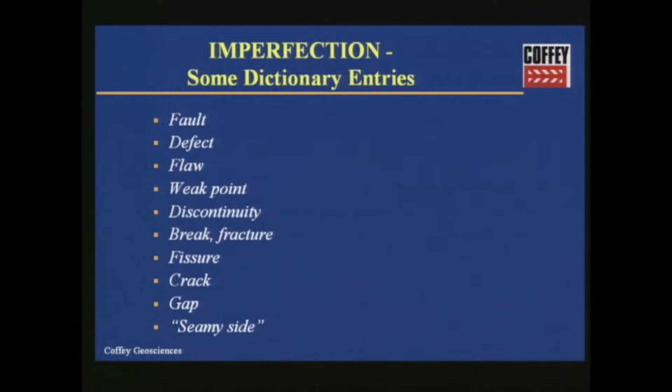Usually we start with a definition of what we mean by imperfections. And if I look in the dictionary, I find a number of suggestions: faults, defects, flaws, weak points, discontinuity, a break or a fracture, a fissure, a crack, a gap, and even the seamy side, which I think has sociological implications, but of course also has geotechnical implications in relation to clay seams in rocks.

And in fact, I'll be talking about that in a few minutes. And basically, the tenor of my talk is perhaps encapsulated in this extract from a poem by the Russian poet Konstantinov, who says, 'If a building collapses in ruins, what does it matter that it was built after a talented plan?' In other words, no matter how wonderful our analysis and our design is, if it does not take account of the realities, then we can finish up in ruins.

This is a rather nice diagram that I've taken from Professor Göran Sällfors of Sweden. And Sällfors looks at the process of idealization, going from the future structure which we hope to design and build through a process of idealization, which means developing a model of the structure, of the foundation, of the soil, and then assigning material properties to it, putting that through some sort of mathematical or analytical process, and then coming up with a prediction and a design.

And I want to focus on the top right-hand corner, the process of idealization and the influence of that on the behaviour of the pile.

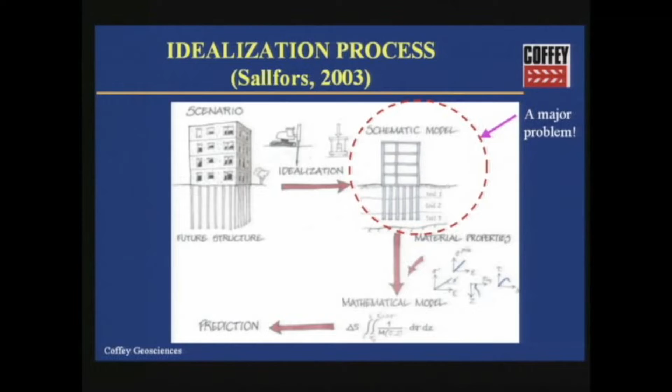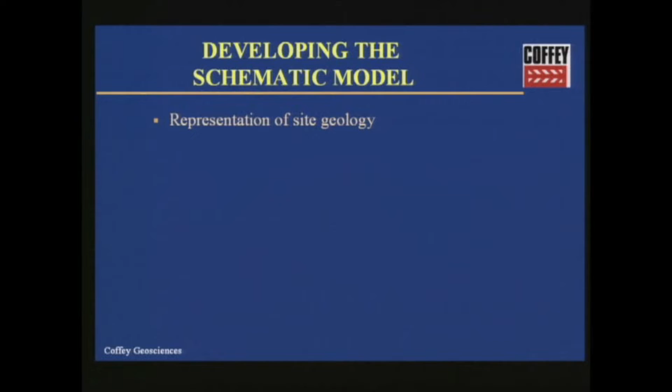Now, there are, of course, a number of important steps in developing the schematic model for our design or analysis. The first of those is, of course, to represent the site geology, and that's of prime importance. The second is then, having recognised the origin, the geological origin of our site, to try and represent it in some sort of simplified form so that we can analyse it.

Then, of course, we have to assign parameters, geotechnical and possibly structural parameters, to our model. And then we have to also bear in mind some of the real behaviour aspects: the fact that soil is non-linear, the pile itself may be non-linear, the soil will be layered and not a nice uniform soil deposit, and we may get loading of the piles not only by structural loading directly, but also by the action of ground movements on those piles.

So I'm going to look at three sources of imperfections affecting the model, the realities of life: natural geological sources, imperfections created by having inadequate investigation, and thirdly, construction-related imperfections.

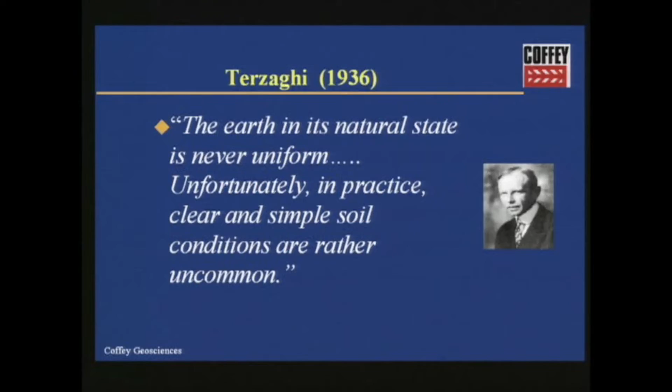In relation to the first, Terzaghi, who is eminently quotable on many things, says, 'The earth in its natural state is never uniform. Unfortunately, in practice, clear and simple soil conditions are rather uncommon.' And this, of course, is in conflict with the way that we tend to teach soil mechanics and the way that some people tend to practice it.

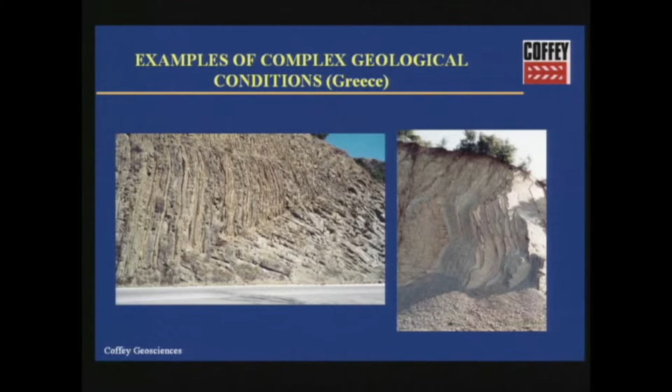Inadequate investigation - this is unfortunately more common than it should be. I've just shown here a hypothetical situation where we tend to try and minimise the number of boreholes because we are always under pressure to reduce the cost of this investigation, although we as geotechnical engineers recognise the folly of this, but unfortunately can't transmit it to the people that pay the bills.

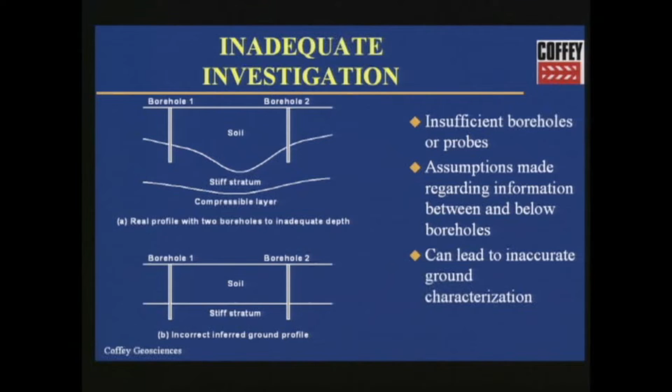So here's a situation where we drill two boreholes, we find a stiff stratum, we think that's good, and then we go away and we draw this simplified representation of that site. And unfortunately, as you can see here, what we may miss is the fact that the soil layer is not uniform in thickness, and below that stiff stratum is something that's compressible. So an insufficient number of boreholes or an insufficient depth of investigation can lead to inaccurate ground characterisation, and that clearly has consequences on the foundation behaviour.

And again, Terzaghi gives us a nice quote. He says, if the subsoil conditions have been misjudged, for instance, on account of inadequate sampling operations, erroneous interpolation between boreholes, or lack of care in the examination of the soil samples, the difference between anticipated and real settlement can be distressingly important.

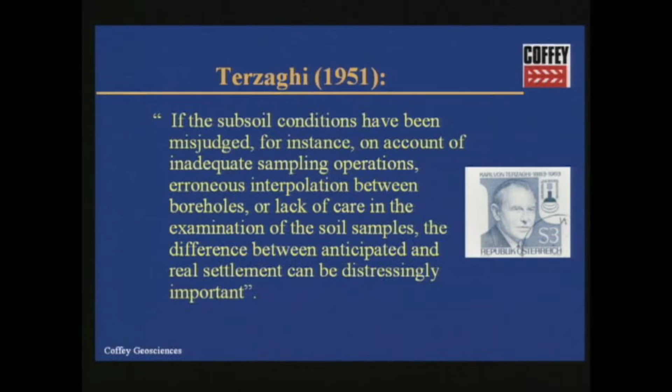And then, of course, we have construction-related imperfections, and these can arise no matter what method of installation is used for the piles. The diagram on the left, I believe, is actually from round this area. Somebody gave this to me many years ago, and I thought it was rather a nice one, and I show it to you now - the situation where you keep driving the pile and you think, oh, it's going deeper than I thought, and in fact the pile itself is simply squashing.

And then there's the infamous diagram on the right, which many of you will have seen, where the pile driving process on the other side of the road seemed to be taking far longer and the pile was going far deeper, they thought, but in fact the pile had changed direction because of its lateral instability and finished up jacking the car on the left-hand side up.

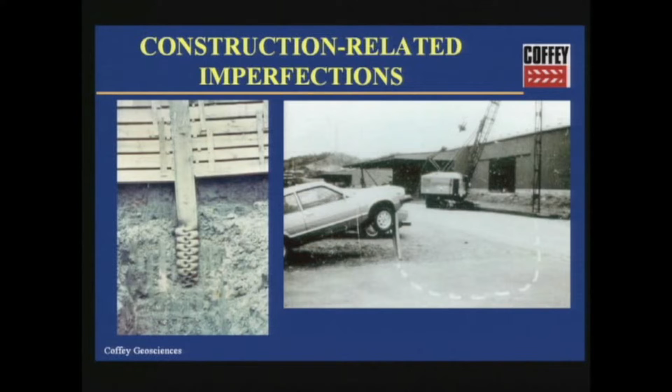So these are some of the imperfections that arise from geology, and of course we have a similar set of imperfections which are related to the construction of drilled shafts.

Now, if we're going to look at the effect of some of these imperfections, then we need to have methods of soil structure interaction analysis, because ultimately the behaviour of piles is a problem of soil structure interaction.

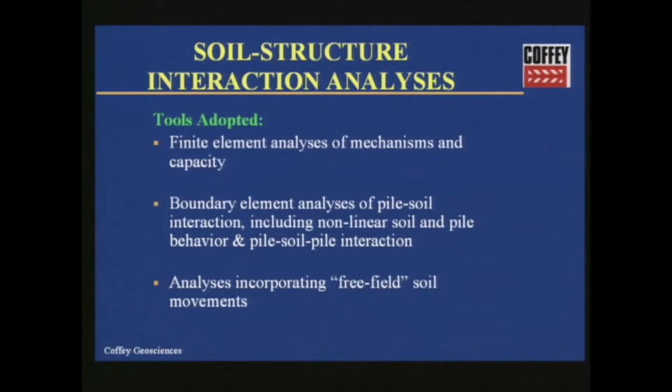And so in what I'm going to describe to you tonight, I've used a number of tools. I use tools as I see fit - I don't have a single tool that I use for everything. So you'll see I've used finite element analyses to understand the mechanisms of behaviour in some cases and to look at ultimate capacities. I've used boundary element analyses to look at settlement and lateral deflection problems. And in those methods, we've also had to incorporate the means of analysing so-called free field soil movements - movements that arise from some source other than direct loading but may impact and load the piles.

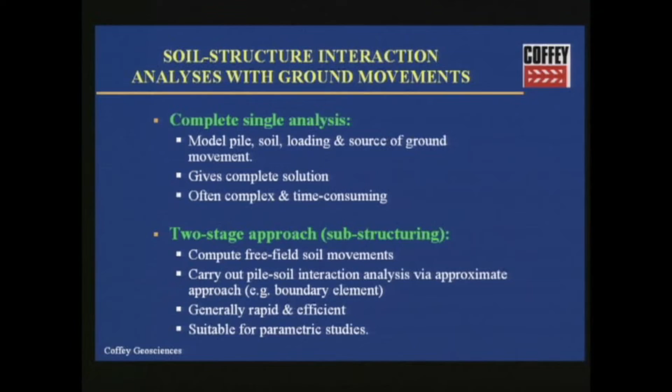With respect to those sorts of analyses incorporating ground movements, there are really two ways you can go about this. The first is that you can use a single analysis where you model the pile, the soil, the loading and the source of ground movement as one, which gives you a complete solution, but that can be time-consuming, particularly in three-dimensional problems. The method I tend to favour, because it's more efficient, is a two-stage or substructuring approach.

Here we compute or take in some way the free field soil movements that occur, for example due to reclamation or due to embankment construction, and then we use those calculated soil movements in a soil structure interaction analysis to find out how the pile responds. That generally is rather rapid and efficient and very suitable for parametric studies.

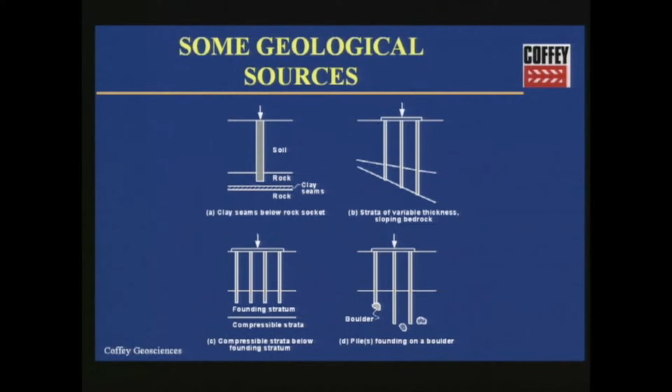These are the geological sources I'm going to touch on fairly briefly. Four problems: one is the seamy side, a clay seam below a rock socket. The second deals with strata of variable thickness. The third, a compressible stratum under the pile tips. And the fourth is the situation where we may encounter a boulder below our pile.

Looking firstly at the effect of thin seams, which is of course a geological imperfection, the analysis approach adopted here is firstly to look at the pile tip and do a finite element analysis to see what influence that clay seam has on the stiffness and capacity of the tip itself. The second stage then is to take those results and put them into an overall pile soil interaction analysis to see how the overall load settlement behaviour of the pile is affected, and then we can go one step further and look at group interaction effects.

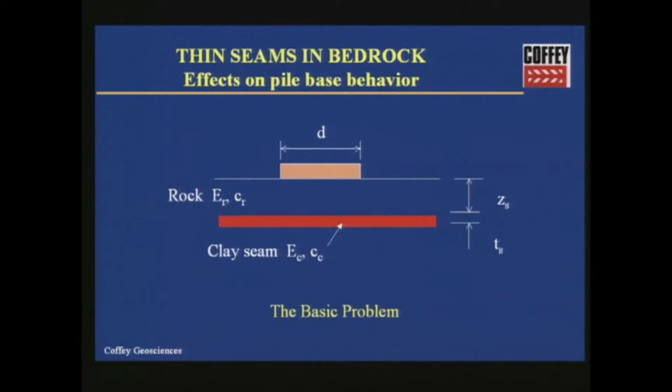So here's the basic problem. We have the pile tip, diameter D, we have a rock, and at some distance ZS below the pile tip we have this clay seam which is of a particular thickness TS. And if we use our finite element analysis, done with the program Plaxis, commercially available, this is the situation.

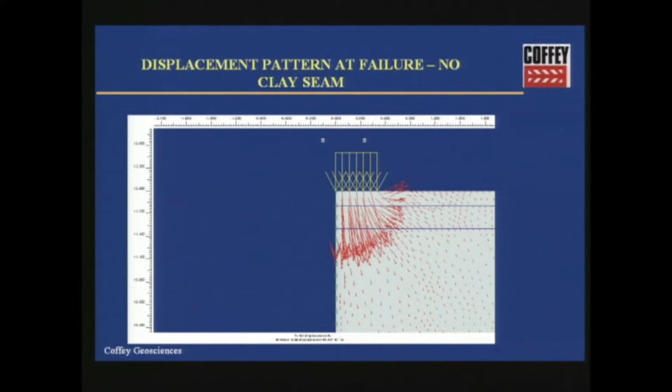Firstly if we have no clay seam, you see we have this sort of pattern of displacement which gives us a reasonable idea of the mechanism of behaviour and of failure.

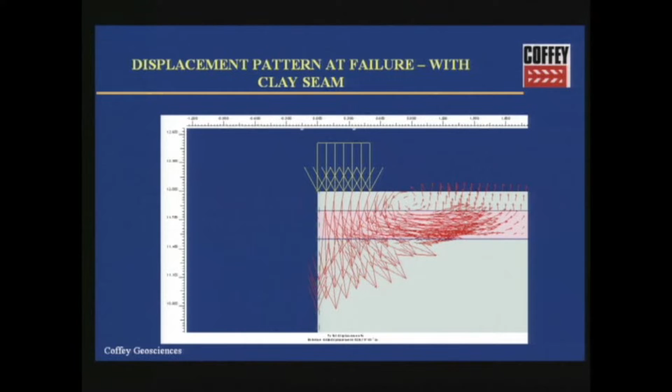Now if we have a clay seam and it's reasonably soft, what you see of course is that that weaker seam provides a path for failure of the soil mass or the geotechnical mass. And one would therefore expect that the behaviour of the pile tip with that clay seam will be rather different from that without the clay seam. And indeed that is the case.

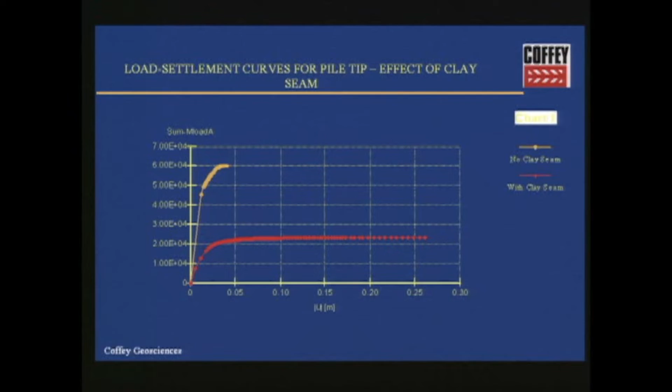This is a load settlement plot, load on the vertical axis, settlement on the horizontal axis. The steep orange curve is the case without a clay seam. The red curve is the case with the clay seam. So in this particular case, there's been a dramatic reduction both in stiffness and certainly in capacity of that pile tip.

And if we look more generally at this problem, we can express the effects of clay seams on the behaviour of the pile base by means of reduction factors. One for the effect of the seam on base capacity, which is CBS - which has nothing to do with the network - that's the base capacity with the clay seam divided by the base capacity without the clay seam. And then we have the same sort of parameter looking at the reduction in stiffness of the base with the seam compared to that without the seam.

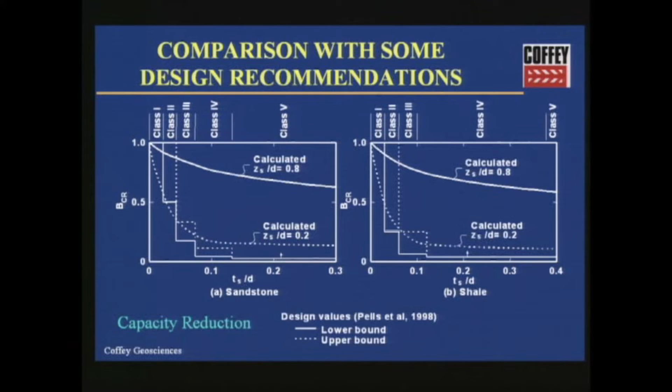However, if you have a seam such as the upper line, where the depth to the seam is, let's say, 0.8 of the diameter, then the effects are much less than the design recommendations would suggest. So basically these recommendations, and there are similar ones used by the Canadians in their Foundation Engineering Manual, are generally on the ball or conservative, certainly conservative if the location of the seam is well below the pile tip.

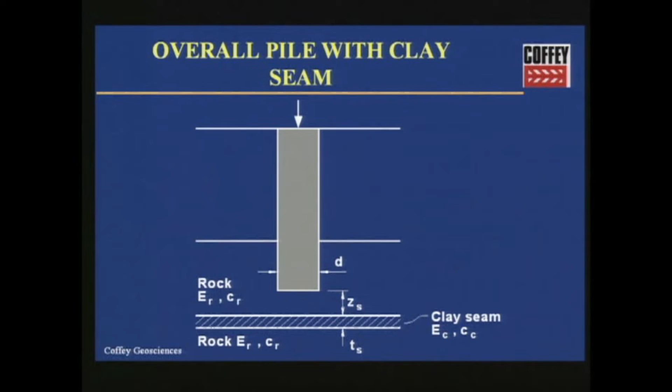The next stage is to look at what happens to the pile itself, because so far we've only looked at the effect on the pile tip. Here is a typical situation: we have a pile which has shaft capacity and stiffness as well as base capacity and stiffness. So we can go through a complete analysis looking at how that situation behaves, and compare the overall capacity and stiffness of the pile, shaft and base, as a function of the clay seam.

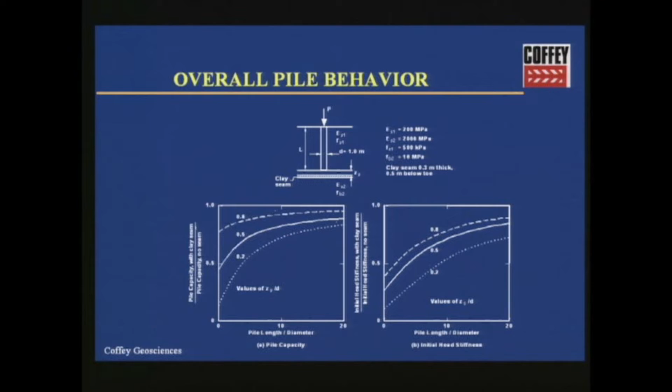But as the pile gets longer and you carry more load on the shaft, the imperfections that influence the pile tip so dramatically become less important for the whole pile. By the time you've got to 20 diameters length of pile, even the most severe effect is damped down, so you have only 10, 15, maybe 20% effect on capacity and stiffness. In general, the greater the amount of load carried by the shaft, the less the effect of the clay seam on pile capacity and settlement.

And that has a corollary: the stiffer the soil is along the shaft, or the more slender a pile, both of which tend to enhance the amount of load carried by the pile shaft, the less important is the clay seam.

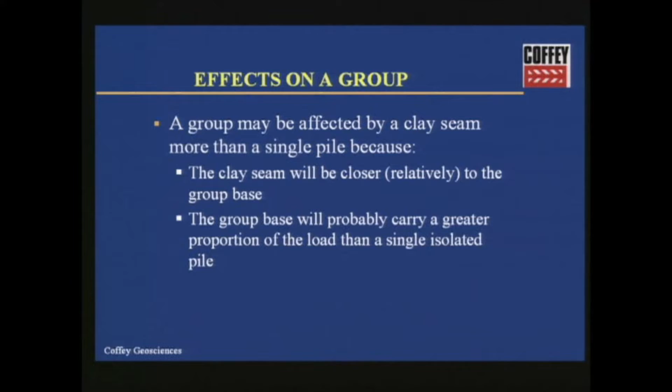Now I have no detailed results here because of time, but if we look at the effects on a group of piles, it turns out they can be a little more affected than a single pile for two reasons. One is that if you look at a group of piles idealised as an equivalent block, the clay seam will be relatively closer to the base of the group than for a single pile. Secondly, from the mechanics of pile-soil interaction, a group of piles tends to carry more load on the base than a single pile. Both factors make the seam rather more important for a group than for a single pile.

The second geological imperfection I want to discuss rather briefly is what happens if we found piles on a layer of variable thickness. The possible effects here are firstly that if you have piles of different length or stiffness, or the founding conditions vary, then the pile group subjected to vertical load, instead of going down vertically, will also tend to rotate, giving rise to a lateral response which we may or may not have thought about.

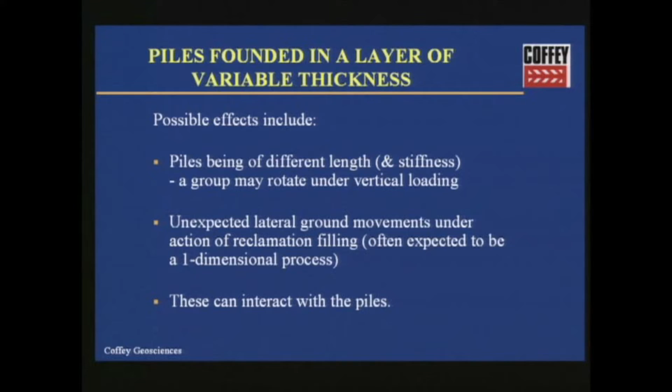Another interesting aspect, one I encountered last year in a project in Hong Kong, is that if you have layers of uneven thickness, particularly a layer which increases in thickness, when you do a reclamation or filling on that site, we normally expect reclamation to be a one-dimensional process. But in fact, with layers of variable thickness, you also get lateral deformations. And if you've got piles in the vicinity of that reclamation, those lateral ground movements can interact with the piles and give you effects you didn't expect.

There's this example in Hong Kong, which I'm not at liberty to tell you too much about, but it was a 26-storey building founded on 144 steel H piles on a reclaimed area, and there were large settlements adjacent to the building, which were expected because it's soft clay below there, and then you get into better material.

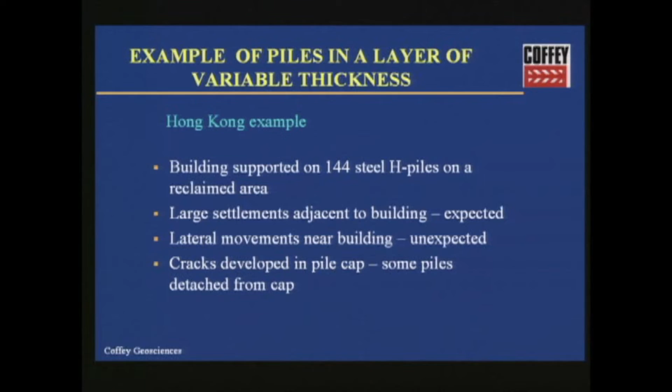But what was not expected was the extent of lateral movements near the building, due to the fact that the ground was not horizontally stratified, but we had a thickening of the compressible clay layer. And what happened because of that was that cracks developed in the pile cap, and in fact some of the piles were indeed detached from the cap.

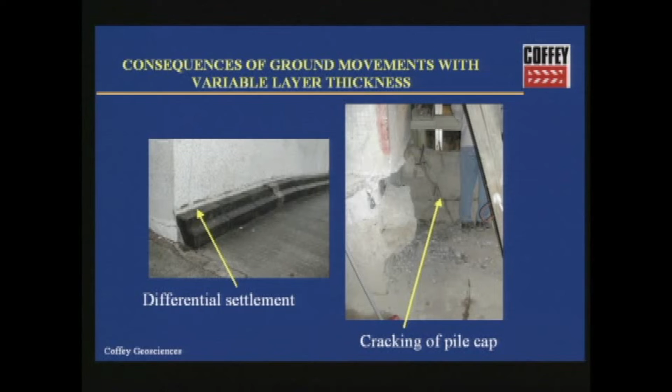These are just a couple of pictures. The left-hand side shows you the sort of differential settlement you get between the building, which is supported on piles, and the ground, which is settling. But you see on the right-hand side a rather ugly crack in the pile cap, and that we attributed to the fact that the lateral ground movements were sufficiently large that they basically caused the piles to yield at the top and to rotate, and therefore to crack that unreinforced pile cap.

The next case I want to look at, again fairly briefly, is what happens when you have an underlying compressible layer. In the written version of this paper, I'll include some parametric studies and theoretical analyses to try and give some indication of that effect.

Below that, unfortunately, was a layer of Leda clay, which, although it's described as firm and silty, is actually quite compressible. What happened here was that pile tests were carried out on a single pile, and they showed a settlement of about 1 millimetre or so.

The designers said, fine, that looks good, we'll allow for group effects, so they got their estimate of settlement of 3 to 6 millimetres. And what unfortunately happened was that in the subsequent 4 or 5 years, they got settlements of up to 70 or so millimetres.

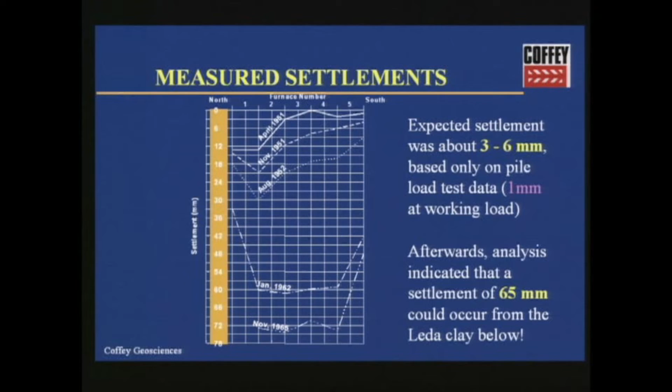So clearly we have lessons from this very nice case history. Don't use single pile load test data to predict group settlements without proper ground characterisation. And secondly, obviously, compressible underlying layers can cause substantial increases in settlement, particularly of a group of piles.

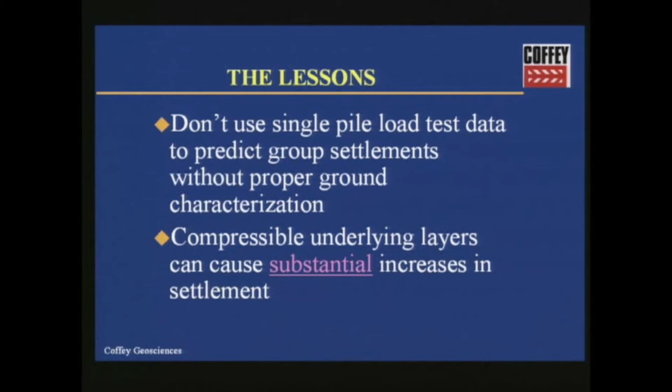The final imperfection I want to discuss in this category is the effects of a boulder. I became interested in this again last year because we had a problem with a very high-profile project on the Gold Coast in Queensland, Australia, where some piles had been jacked into the ground.

Everything looked fine from the jacking record, but when they came to do a static load test on those piles that had been jacked, apparently successfully, they got a static capacity which was only about 50 to 60% of the force that was required to jack the piles in. And the question was, why was this so?

Well, it turned out that in this particular area there had been an old revetment for a canal, so that involved boulders, and subsequent investigation showed that there were a number of boulders.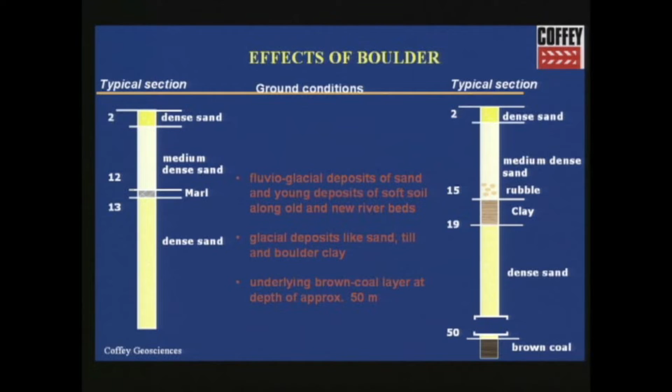So again, it's important that you understand the geological origins of the site, because if you're in a glacial situation, then it's not impossible that boulders will lurk below the surface.

Because of this project and the mystery surrounding it, we did some modelling of what might happen. This is an idealised representation of that imperfection, the boulder. What happens is that during initial loading, simulating jacking, the boulder becomes part of the pile, effectively becoming an enlarged base.

When you stop jacking, having reached what you think is the right capacity, you unload the pile. But the pile then detaches from the boulder, and when you reload, you generate skin friction. Once that friction is fully mobilised, there's a gap between the pile tip and the boulder, making it look as though the pile has failed, until you push it far enough to recontact the boulder. That's what this exercise simulates.

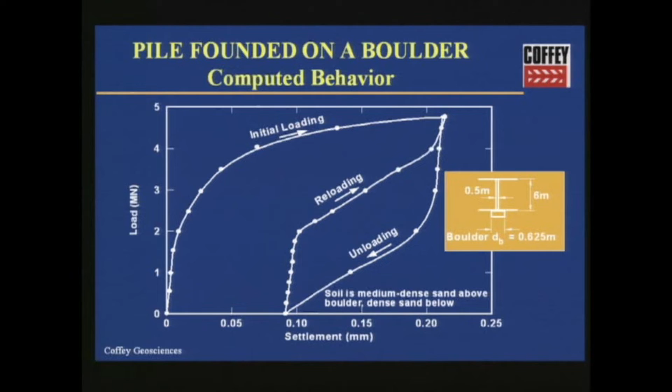If you took that little kick in the reloading curve as your static capacity, you would get what we found in reality: that the apparent static capacity was only half to 60% of what we thought. I believe the explanation is the presence of that boulder.

Summarising the main features of this situation: you get increased resistance during installation, then on load release, detachment of the shaft from the boulder, followed by smaller apparent resistance and stiffness of the pile until the shaft recontacts the boulder. That's when you start to reload.

Obviously these effects are more pronounced on relatively short piles where most of the resistance comes from end bearing, which was the case we had in Queensland.

I now want to talk about construction imperfections. We almost invariably idealise a pile as a nice uniform diameter vertical cylinder, as shown on the right-hand side. But the harsh realities of life are that sometimes you have a non-ideal situation.

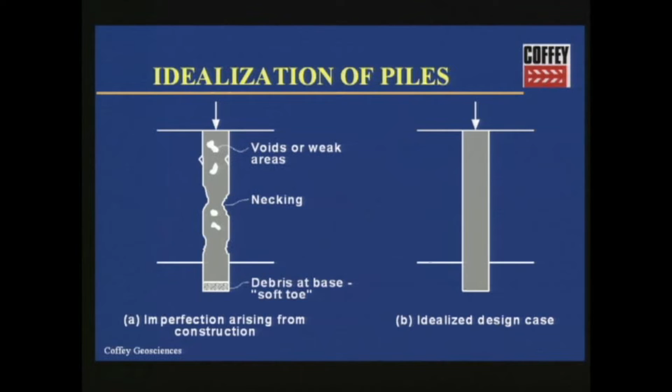You can have imperfections caused by the construction process which result in necking or voids in the pile—these I term structural imperfections. You may also have what I call geotechnical imperfections, which is debris left at the base of the pile due to inadequate cleaning operations—the so-called soft toe situation. That's a geotechnical imperfection.

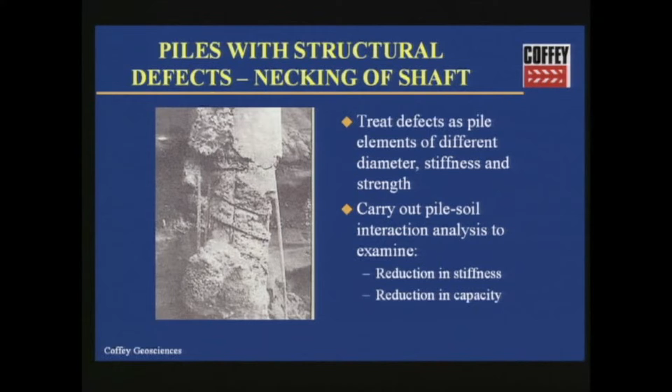If we want to look at the consequences of these construction-induced imperfections, looking firstly at structural defects, we can treat defects as pile elements of different diameter, stiffness and strength, and do some pile-soil interaction analysis to examine the effects of those imperfections on stiffness and capacity.

Here's a hypothetical example that illustrates what might happen. On the vertical axis we have applied load as a percentage of the ultimate capacity. On the horizontal axis we have settlement, and the full line on the left is the ideal situation with no defects.

The dashed lines represent an analysis taking into account the defect—a fairly massive defect, a necking of the pile over 40% of the length of the pile, which you may think is pretty terrible, and indeed it is, but it is not entirely unknown.

Depending on the structural strength of that imperfection, you will get a rather sudden theoretical break-off of the load settlement curve when the stress in that imperfection reaches its ultimate stress. If you have a fairly weak pile, you get a structural failure well below the geotechnical capacity of the pile.

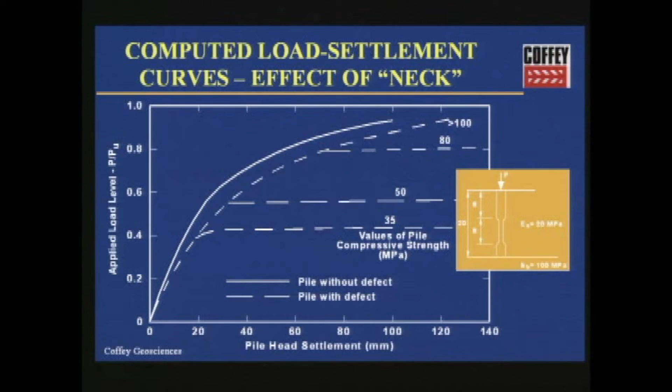So structural defects have the capacity—if I can use that confusing word—to cause very sudden failure and reduce the overall capacity of the pile.

If we want to generalise this, we can look theoretically at introducing a measure of integrity, which I call a structural integrity factor—basically the modulus times the area divided by the length of the defective part of the pile, divided by the modulus times area divided by length of the intact pile.

If there is no imperfection, then this structural integrity factor is infinity. That's good—so big is good in this case.

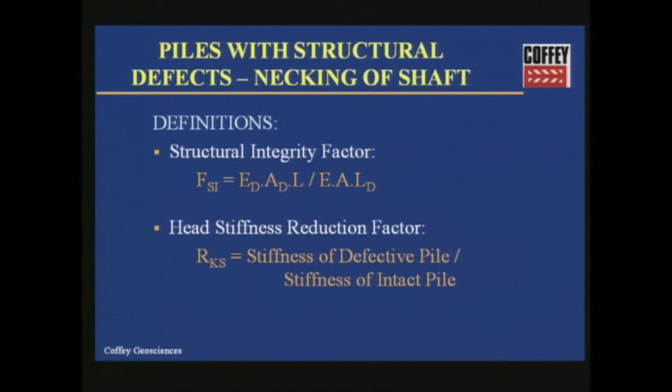We can relate that theoretically to a head stiffness reduction factor, which describes the increase in settlement or reduction in stiffness of the defective pile as a fraction of the intact pile. What I have here on the vertical axis is a plot of the head stiffness reduction factor—the stiffness of the pile with the defect over that without the defect—plotted against the structural integrity factor. If you have high values of that structural integrity factor, the reduction factor is 1, meaning there's no effect. But at low values, in other words rather severe defects, then depending on the depth of that imperfection, you get a significant reduction in stiffness of the pile and potentially of capacity.

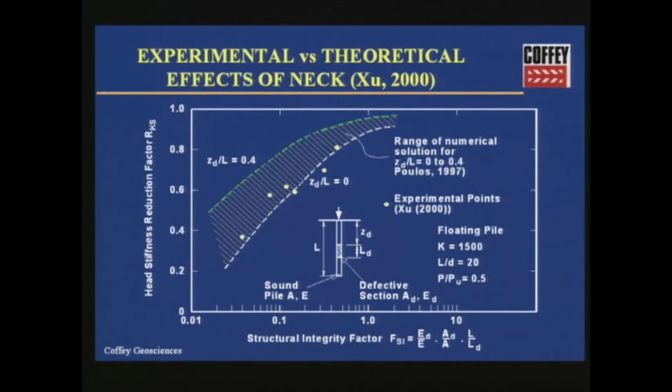You'll also see some yellow dots on that diagram—these are experimental data from model tests carried out by Dr. Kenneth Xu, a former PhD student of mine, which are reasonably consistent with the theoretical predictions of the reduction in stiffness because of those structural defects.

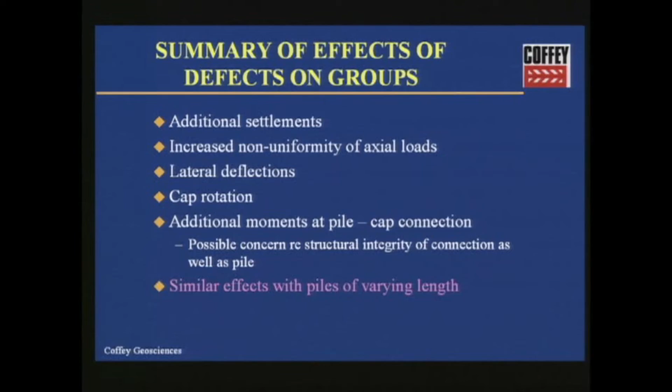Now, that deals with single piles, and the question is what happens if you have one or more defective piles within a group of piles. I don't have time to discuss this in detail, but generally, if you have defective elements within a system, you will have additional settlements, and also non-uniformity of axial loads, because loads will tend to be shed from the less stiff components to the stiffer components. There will be a tendency for lateral deflections because you have uneven support conditions. You will get cap rotation, and you may get additional bending moments in the piles—which, unfortunately, are frequently not designed to carry significant moment—so you may actually get structural yielding of the pile near the pile cap connection.

So the effects of defects on groups are rather similar to the effects of piles of varying length. Indeed, anything that gives you unevenness of support—whether it's defects, a different stiffness of material you're founding on, or varying thickness of soil—will tend to give similar effects.

Now, looking at geotechnical defects, the soft toe that may arise from inadequate cleaning gives fairly obvious effects: a reduction in stiffness of the base, which in turn causes a reduction in the stiffness of the pile head, an increase in settlement, and that tends to be more severe after the shaft friction is mobilised.

Also, those soft toes lead to an apparent reduction in pile capacity, in that you get what looks to be failure of the pile. But in fact, because the soft material at the base of the toe is generally confined, you don't actually get failure as such. You keep squeezing and squishing the material until you get it to a stage where it can no longer do that. You may still have the ultimate capacity of the pile tip available to you, but only after extremely large settlements.

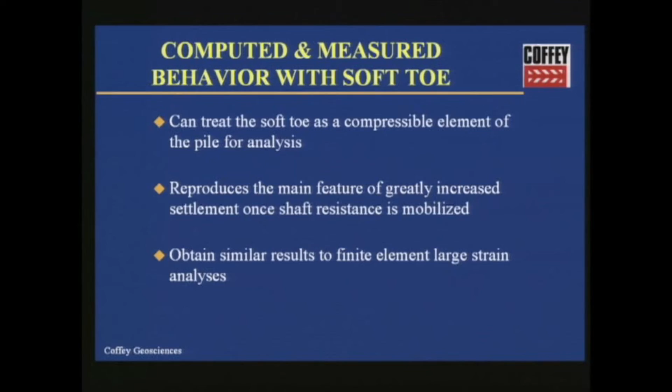Now, how can we treat this sort of problem? Well, we found that you can treat the soft toe as a compressible element of the pile—you add just a little squishy element to the bottom of the pile and treat it as a pile. That reproduces the main features of greatly increased settlement once the shaft resistance is mobilised, and indeed it gives you rather similar results to a finite element large strain analysis.

Just to show you some comparisons between this rather simple-minded approach of treating the soft toe as a compressible pile element—again, these are the tests of Woo and Moh, and there are two piles here.

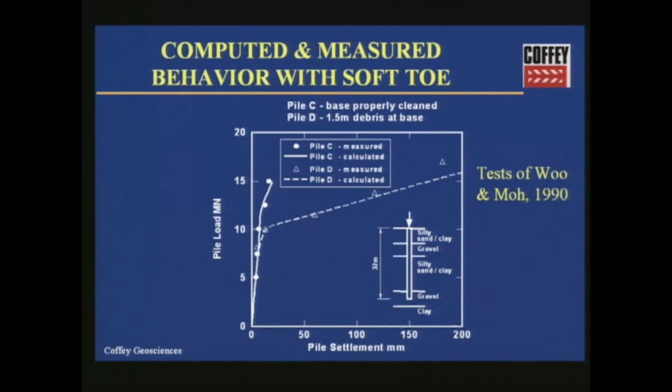One is the full dots here, which are the pile that's been properly cleaned, and you see the full line is the calculation, which matches it well. The dashed line and the triangular elements represent a pile with 1.5 metres of debris at the base, which is rather extreme. But you see that once you mobilise the full skin friction, then that base really takes off in terms of settlement. So this simplified approach seems to work well for that case.

I just now want to describe in a little more detail the situation that we had in Hong Kong 2 or 3 years ago, where there were two high-rise housing blocks that exhibited uneven settlement. And as I'll show you, subsequent coring of the piles revealed that the piles were not what they should be, that the piles were short or not properly founded. So analyses were carried out as part of a prolonged legal process to assess the risks of proceeding with construction and of underpinning the buildings.

And this, of course, gave considerable concern to everybody because the buildings were in fact leaning towards the school.

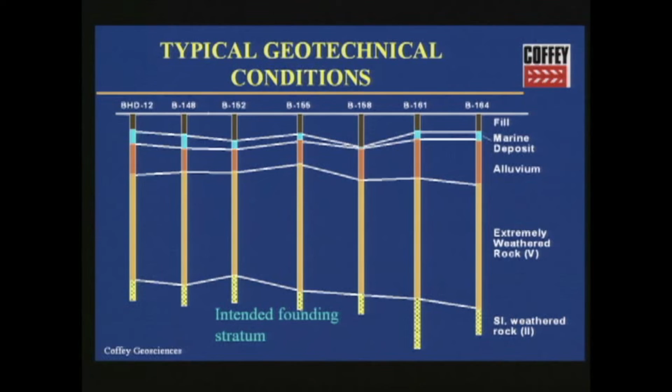Now, when we looked at this, again, we looked at the geotechnical conditions. The piles were supposed to be founded in that lowermost slightly weathered rock stratum, above which was extremely weathered rock and then more compressible materials. But basically, the foundation was meant to be in that slightly weathered rock at the bottom of that profile.

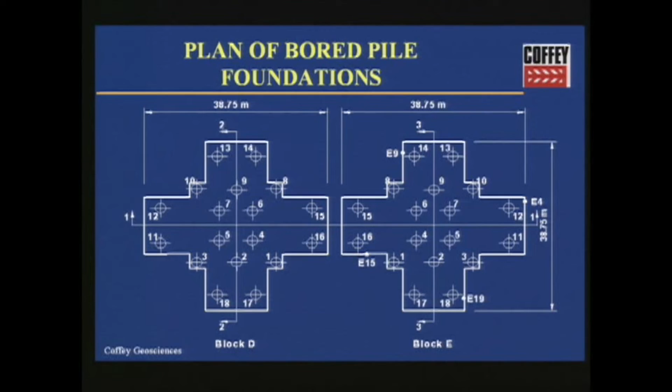Here is a plan of the two buildings. Each was supported on 18 bored piles, drill shafts, 2.3 metre shaft diameter, belled out nominally, but I think in reality they weren't, to 3.8 metres, and designed as end-bearing piles. So these were, and they were supposed to go down 30 to 40 metres onto that slightly weathered rock.

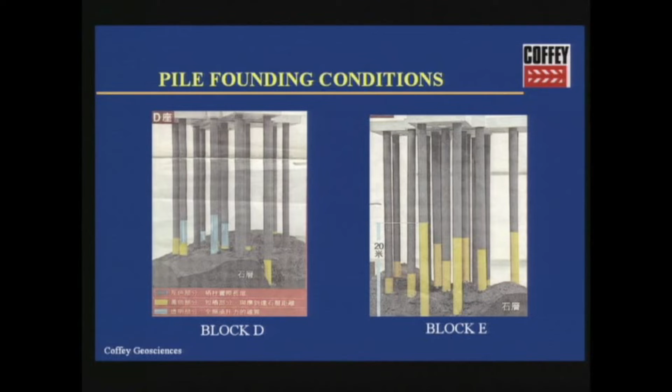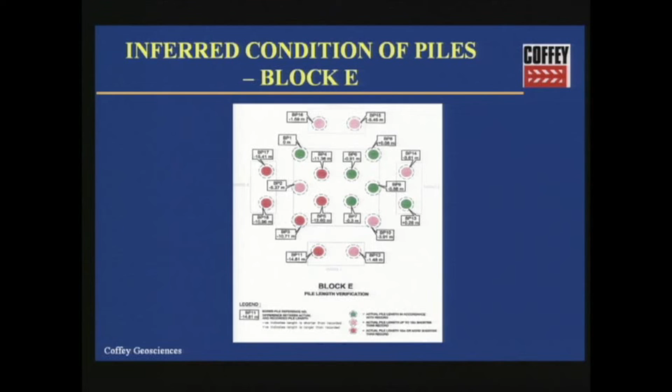In analysing the possible scenarios and the consequences of these imperfections of construction and integrity on the part of the piling contractor, we used a program we developed called PIGS, Pile Group Settlement, which takes account of different pile types within a group.

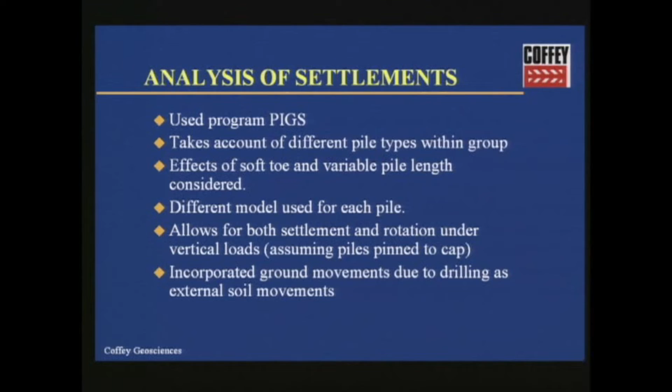The effects of a soft toe and variable pile length can be considered. We can use a different model for each pile, which we were able to do here, and it allows for both settlement and rotation of the pile group. It also incorporates ground movements due to the drilling process, which, as I showed you, were up to 30 millimetres, input as external soil movements.

And we managed to calibrate our analysis with the measured settlement profile. There are 3 different sections that we looked at, and these are the settlement profiles across those sections. The dots are measured, the hashed lines are calculated. So we managed to calibrate the model reasonably well to the measurements.

The reason that we did that was that we wanted to look at possible scenarios for how to cope with this problem. The conclusions we reached from the analysis, and from this case generally, were that the uneven settlement of the buildings could be explained by the presence of piles with soft toes, with inferior founding conditions, and with shorter shafts than designed.

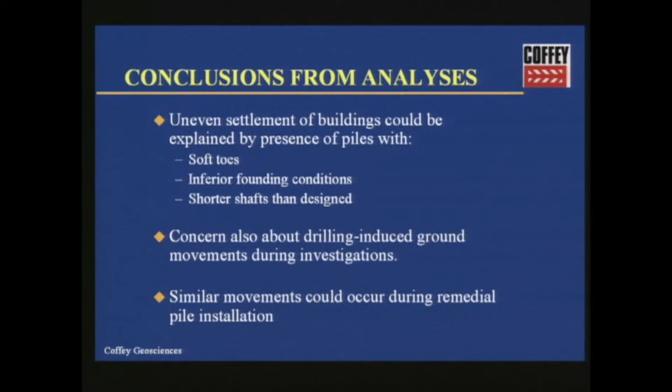There was considerable concern at the time that the drilling process itself caused additional movements, and a concern that if remedial piling were done, as you would have to do to boost up the pile foundation, that drilling could cause additional settlements and endanger the integrity of the whole building.

There were a number of alternatives looked at: the installation of additional piles to stiffen up the low side, if I might call it, of the foundation, but there was a recognition that there were significant risks involved in installation.

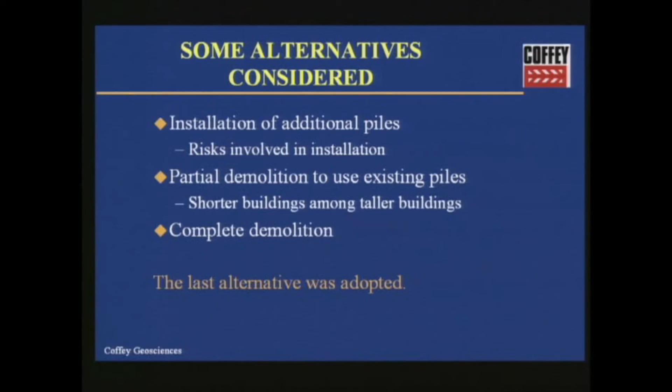Now, what you have to recognise is that we are drilling in ground that is stressed by a 41-storey building, so it's highly stressed, and disturbing the ground is much different to drilling a hole in open ground.

There was an option for partial demolition, to use the existing piles up to the capacity felt to be safe, and to have, in the midst of this 41-storey forest of buildings, 2 13-storey buildings. I think you could imagine that sociological and other considerations would deem that not to be a good option.

Complete demolition was another option, and indeed that was the last option looked at and the one that was adopted. So these 2 buildings no longer exist, they're demolished, and because of the concerns locals have about that site, bad feng shui, there will be no new buildings on that site.

This leads into a more general discussion of how we cope with the consequences of imperfections. There are issues related firstly to investigation, and secondly to design. I won't have time to go into detail on these; one could talk about this at length.

But simply to say that you need to take care to avoid additional disturbance and settlement when doing investigations or remedial foundation work under a heavily loaded building. This is by no means the only building I've had experience with that has settled due to investigation or remedial drilling. SPT testing has to be done carefully, because the whole process has to be very, very carefully controlled. It's not a process you can abuse.

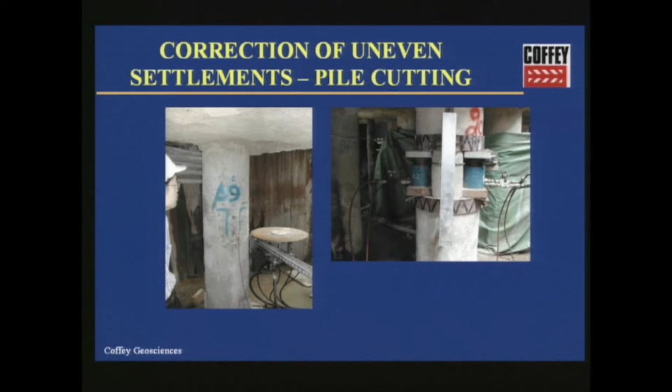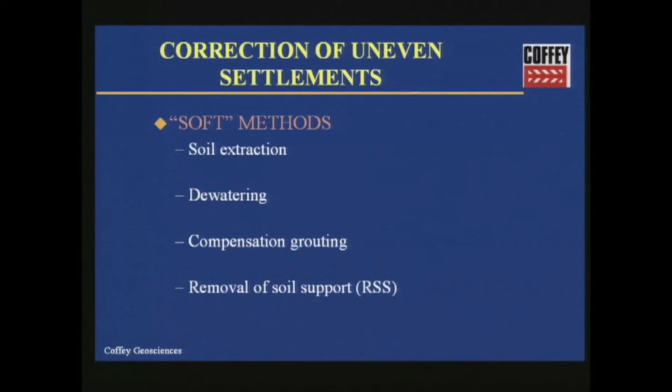There's another class of methods which I call soft methods, which I really like because they don't intrude on the foundation but get nature to work for you. Soil extraction is one, which we know from the Tower of Pisa, a magnificent restoration. Dewatering, causing additional settlement by groundwater removal, is a possible means, although I'm often nervous about that because dewatering is not a process you can control precisely, and you do need precise control. Compensation grouting to jack up low bits is a possibility, as long as you don't then cause subsequent settlement, because when you jack up, you also jack down on what's below, and action and reaction have to support each other. There's another approach called the removal of soil support, a method we developed and hoped would be used, but they got cold feet.

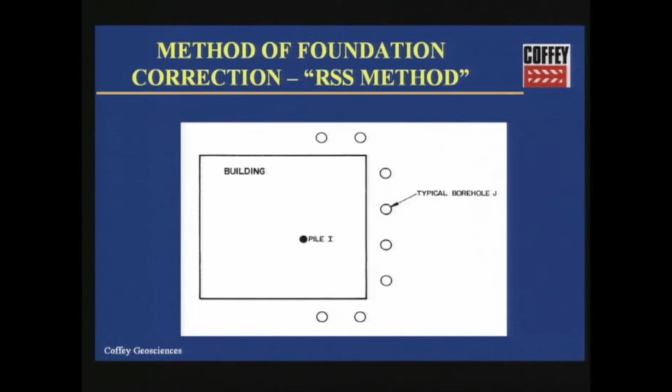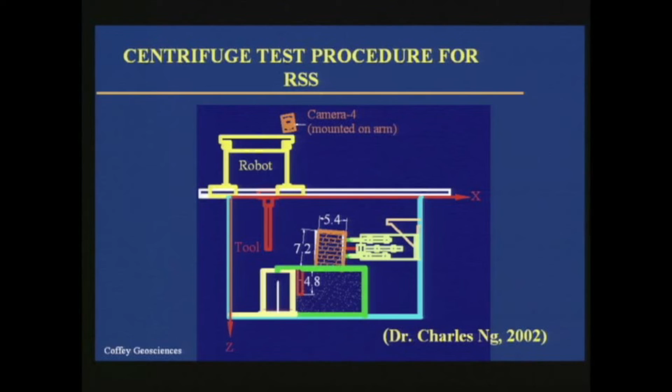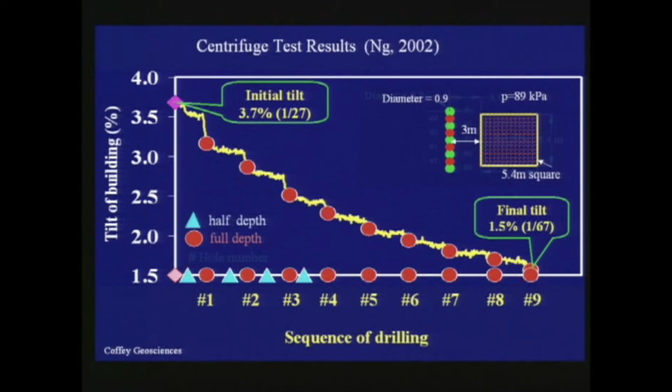My colleague at the Hong Kong University of Science and Technology, Charles Ng, did some pilot centrifuge tests. These were not with piles, just a shallow footing, to see whether drilling holes outside the footprint of a loaded, tilted footing would work. Here's his centrifuge setup, with a footing originally tilted at 1 in 27. He got his clever little robot to drill a series of holes, firstly staggered, and then came back and filled in between. The vertical axis shows the tilt of the building in percent versus the sequence of drilling, from hole 1 to hole 9. Drilling 9 holes outside the footprint of that loaded foundation caused the tilt to correct from 1 in 27 to 1 in 67. So I think that's a process with some potential for remedial work.

Now, very quickly, foundation enhancement works. It may be necessary not only to correct the settlement, but also to boost the foundation capacity and stiffness. You can try to do that if you know you have defective piles: repair the piles themselves, extend the pile cap to strengthen or stiffen the foundation, or add new piles to strengthen or stiffen it. For enhancement work on piles, you can use structural repairs if you have structural defects, and if you have geotechnical defects, you can attempt to grout the base.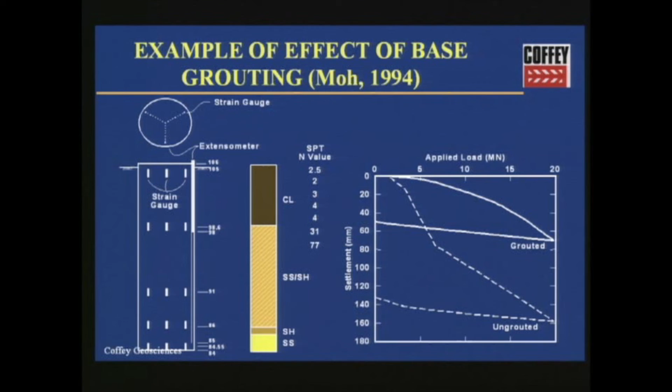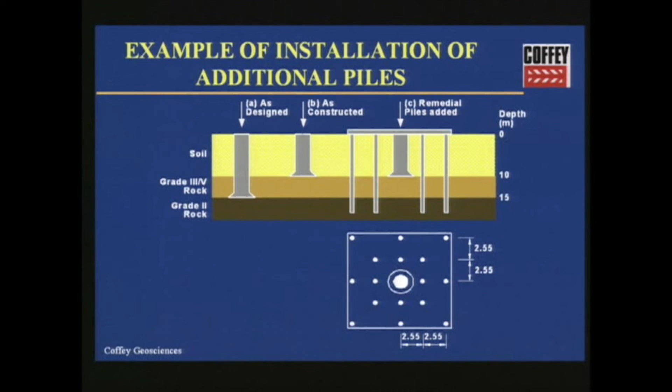Grouting the base of the pile can result in substantial improvement in performance. Here is another example, again from Hong Kong, showing a situation where the bored piles were supposed to go down to the brown layer, grade 2 rock, but coring indicated that they in fact only went to an inferior grade of rock. They were shorter, and so remedial action was taken - additional piles were added to stiffen up the foundation system.

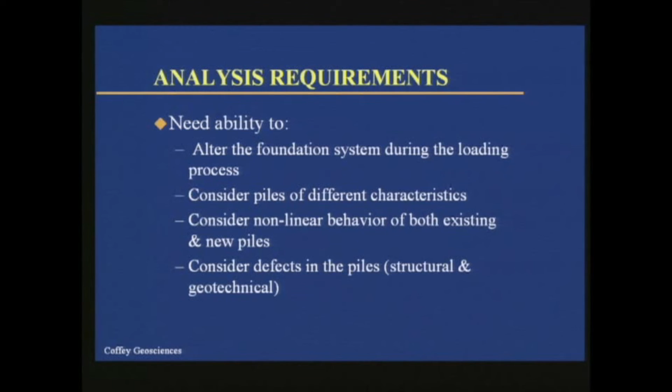What we did here was to look at the performance of the upgraded foundation. To do this, you need an analysis which can alter the foundation system during the loading process, because you are adding piles after the loading has started. You need to consider piles of different characteristics, because generally your new piles will be different to the old. You need to consider nonlinear behaviour of piles, and you need to be able to consider defects in the piles.

The other important thing is that you should look at the distribution of load between the existing foundation system and the new foundation system. If you're putting in a foundation system that is a lot stiffer than the existing system, then that will tend to attract the early incremental load. But you can control the way that the load is shared between the new and old systems by using this sort of system of controlled stiffness inserts.

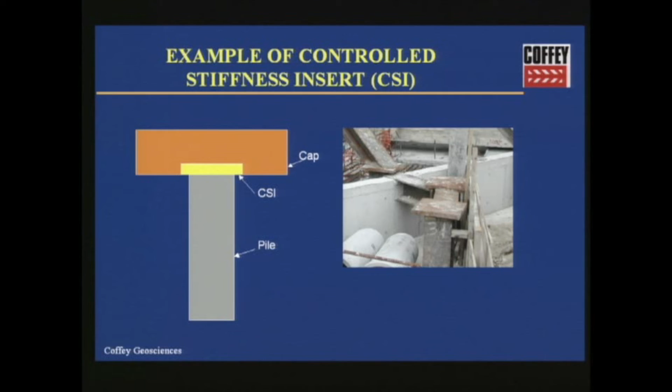These are simply inserts - they can be neoprene rubber or some compressible material - that you put between the pile head and the pile cap. You can work out what stiffness you require in order to get that overall cap plus insert plus pile system to have the required stiffness, so that it settles and therefore distributes the load in the way that you want. This is a very simple way of calculating the stiffness of the insert you require in order to get the performance you require - you can't have much more simple equation than that.

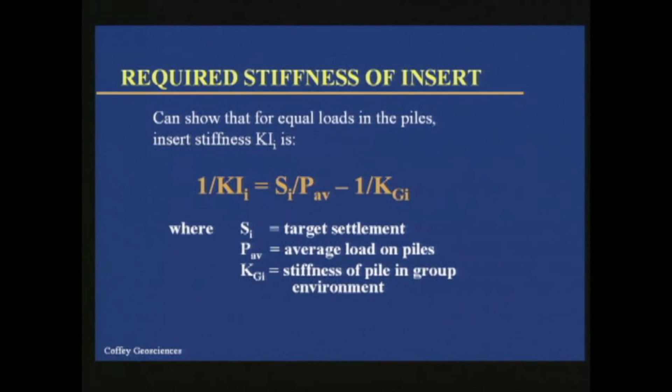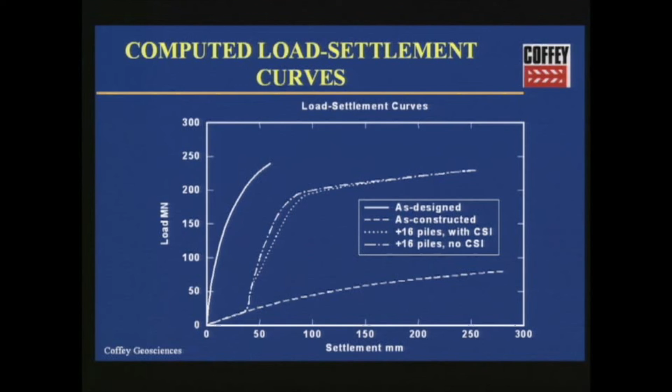In a place like Hong Kong, where design is dictated by the load in individual piles, to be able to have uniformity of load is a much more efficient design. So additional piles obviously can restore the performance of a defective pile. The load distribution in remedial piles is generally non-uniform, but you can achieve or head towards uniformity by the use of these controlled stiffness inserts. That's of particular advantage if your design, as it is in Hong Kong, is controlled by the maximum pile loads.

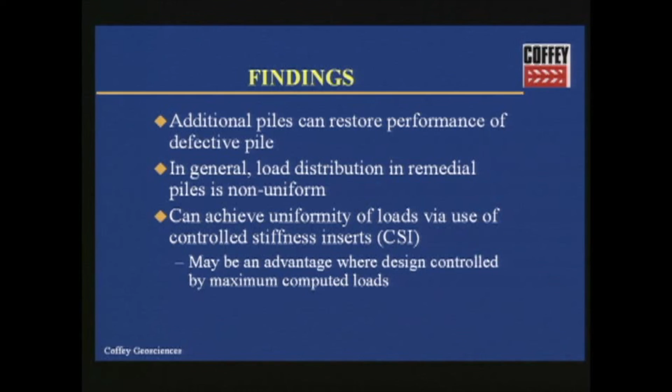So just in conclusion, just a few observations. Firstly, in terms of imperfections, the world is imperfect, and imperfections that relate to piles can create unforeseen problems for designers.

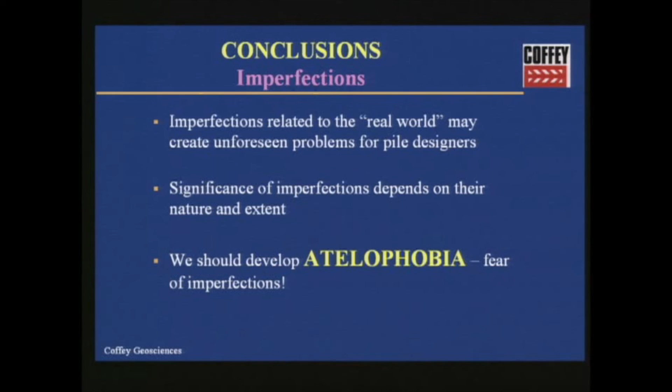The significance of those imperfections clearly depends on their nature and extent, but I think we should develop at least a mild form of atelophobia, the fear of imperfections. We should be looking for them. We shouldn't assume that because we as designers draw a nice uniform pile, drawing horizontal lines to represent the soil profile, that nature is so obliging.

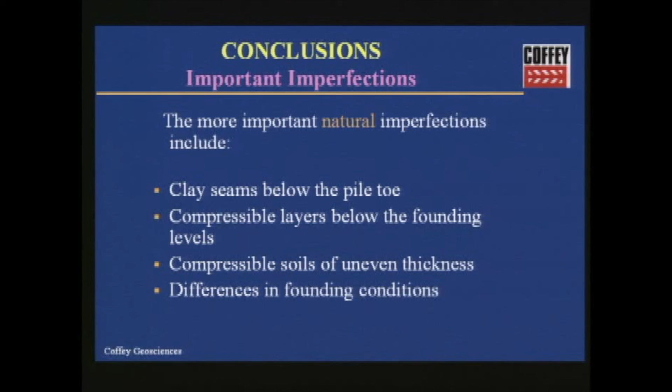The important natural imperfections I've considered, and these are but a few of many, are clay seams below the pile toe, compressible layers below the founding levels, compressible soils of uneven thickness, and differences in founding conditions, for example due to boulders. In general, anything that gives us a variable founding condition will tend to lead to differential settlements within the group, to lateral movements, to head rotations, to induced bending moments in the pile heads, even under purely axial loading.

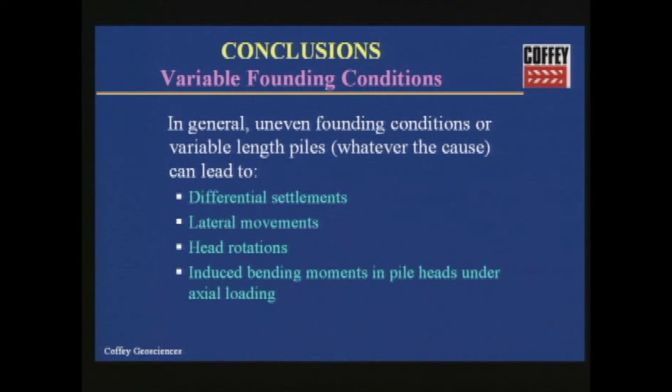So you need to be very careful. If the pile contractor says, do I really need to put reinforcement at the top of the pile, there's not very much lateral load - you probably need to allow for these sorts of imperfections.

In terms of construction-related structural imperfections, the pile capacity depends on the strength of that defective section, and failure can be sudden. You may have little or no warning, and then the pile just goes bang. There may also be some reduction in head stiffness.

With geotechnical imperfections, the result is generally more gradual. You don't have this sort of sudden failure. You have what appears to be a much softer behaviour, and again that will depend on how much of the load is carried by the base.

In coping with imperfections, we need to take great care in investigation. I think this is something that people have perhaps overlooked - the fact that when you do investigations, you are disturbing what is usually highly stressed ground, and there are consequences. Ground movements may be induced, and they may in fact interact with the existing foundation which you're trying to preserve, and it may be counterproductive.

And in terms of correcting uneven settlements, I think you have hard and soft methods available. Again, you need to be very careful with remedial piling that your side effects don't cause a problem.

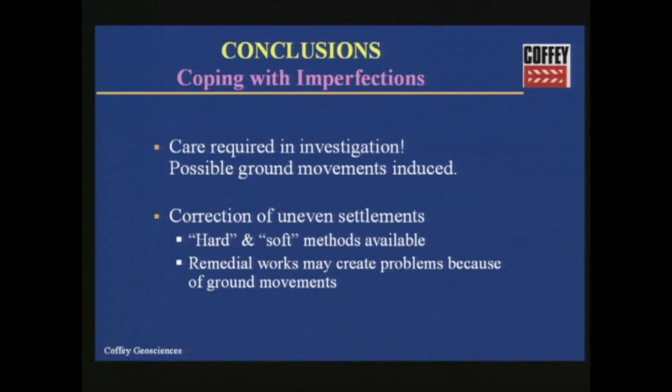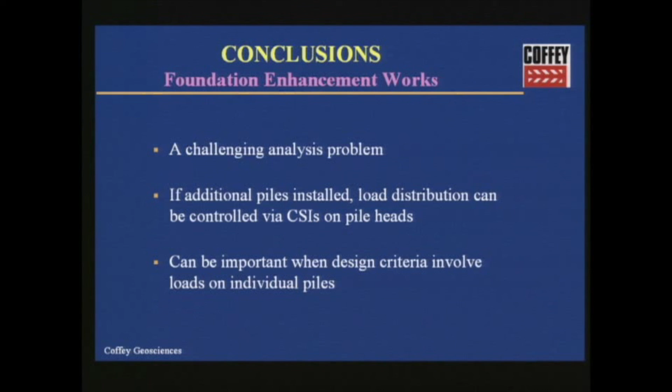In terms of designing enhancement works, it's a challenging analysis problem because you have a situation where the system changes during the loading process. You can control and design the remedial system to have the load distribution that you want. It's not a difficult process, and it has been used in Hong Kong quite successfully, and it can be important where your design criteria involves limiting loads on individual piles.

This is the cover page of Terzaghi's famous Theoretical Soil Mechanics, published in 1943. This is the book that I had to try and read as an undergraduate. This is the book that I had difficulty in understanding. But this is the book that intrigued me about geotechnical engineering and soil mechanics as it was known then - the uncertainty of it all.

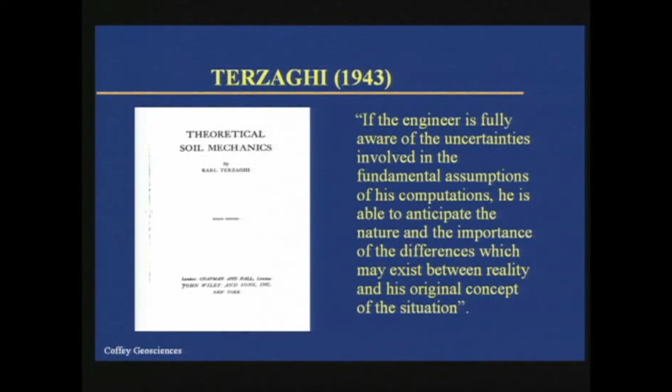And I think, again, it's encapsulated in this quote by Terzaghi: if the engineer is fully aware of the uncertainties involved in the fundamental assumptions of his computations, he's able to anticipate the nature and the importance of the differences which may exist between reality and his original concept of the situation. So, ladies and gentlemen, I hope that in this lecture I have perhaps assisted you to understand a little better the importance of those differences arising because of the realities and the imperfections of real life. Thank you very much.